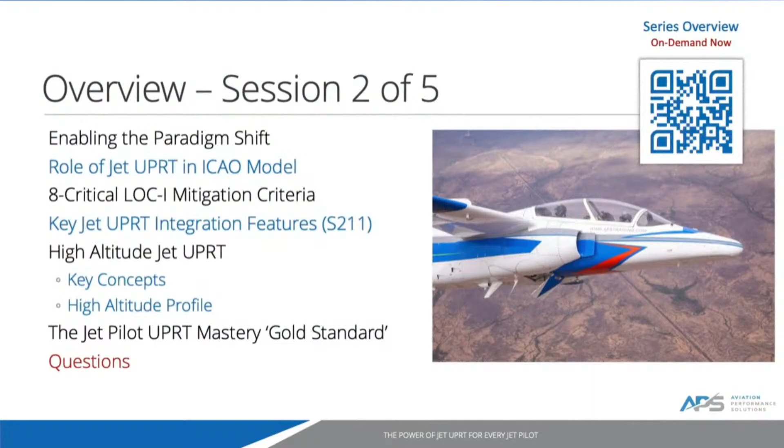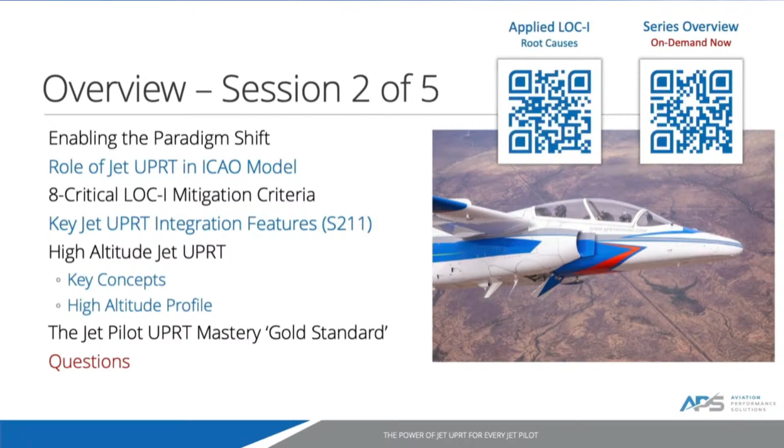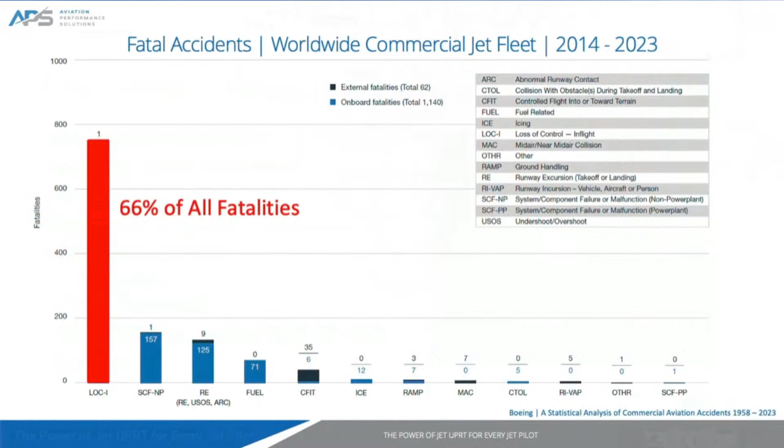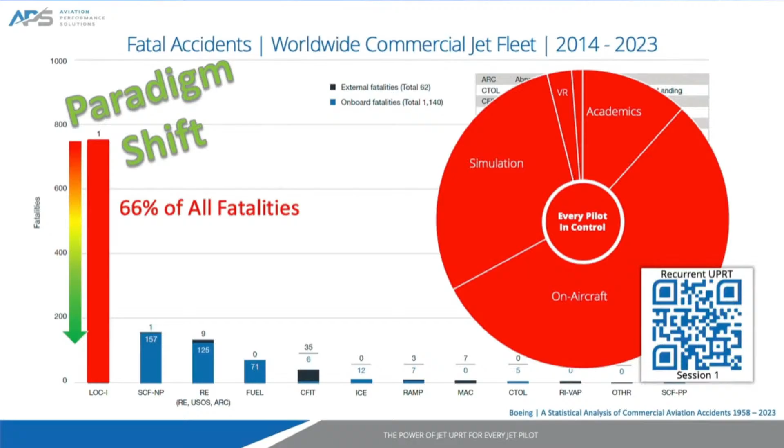All right, this quick review is just a reminder of how threatening the threat of loss of control in flight is and how we mitigate this risk. In our recent session, which I'll give you a QR code for in a second, we talked about the various platform contributions and how we mitigate this risk, which is really necessary to create the paradigm shift that we need to drive down that risk. A key part of that is not just on-aircraft training, but also jet upset training, which is really instrumental, especially for jet pilots. You can go ahead and do a deep dive on the application of the platforms, what proportion are used, and how much they contribute by simply going to that QR code in our last session, which was on recurrent UPRT.

And I hope you enjoy that. If you want to learn more about this particular diagram, you can go back and have a look at that session. Okay, so this is the opening slide.

And I think it's perspective building. If our jet UPRT is to give pilots a competency in this situation, it really requires a very intentional training process to accomplish that. But I want to remind everybody that the very first priority competency is that we don't want to be in that situation in the first place.

The second one, of course, is how to execute the recovery and to solve it. But really the most important value of recovery training is building the mental model to better understand the awareness, recognition, and prevention of the airplane upset in the first place.

So really the key priority, in addition to the ones we've talked about, is the been there, seen that value, or more specifically for on-aircraft training, the tremendous value it brings is on human factors, which we're going to be talking about in session 4.

So let's go ahead and jump in and talk about how we actually use different training platforms to make this situation something that pilots can understand, recognize, and prevent, or should they get there, be able to solve it.

All right, let's jump right in here now and talk about what ICAO did in 2014 after 5 years of work with 40 organizations and 80 experts around the world, which APS had the honor to be part of. They created some fantastic guidance and resources for the industry to follow.

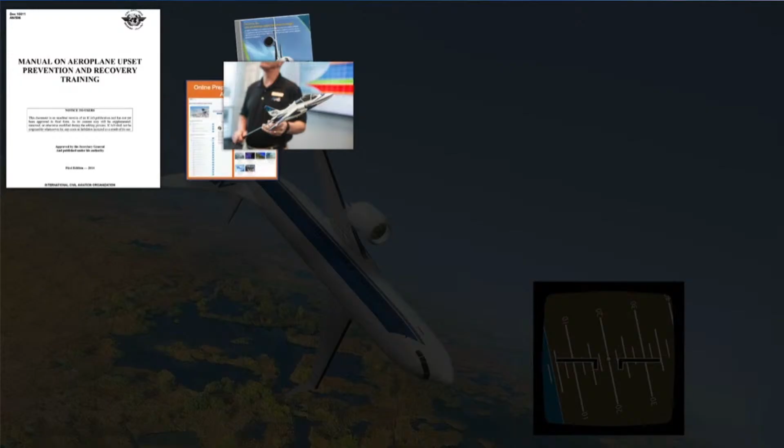As I mentioned earlier, it really talks about what to do. So with any critical training area, and especially important in upset prevention recovery training, we have to start with comprehensive academic training. That is the key, that is the foundation.

But unfortunately, academic training on its own is quite limited in its ability to mitigate the risk of loss of control in flight, for a number of reasons.

The skills are counterintuitive. Usually they require a sequence and movement of the controls that is different than what you would apply in your normal flight experience. And also what you end up finding is the human factors are very incapacitating in an airplane upset event if you haven't had proper training in how to perform in spite of them.

So let's move on to the next one now, which is on-aircraft upset prevention and recovery training. Most people see that, and also as ICAO envisioned, that would be accomplished in a piston aerobatic airplane. Now, ICAO doesn't require an aerobatic airplane.

They strongly recommend it, and so do we. In our judgment, you can't effectively deliver life-saving upset training unless you have an aerobatic-capable airplane and a highly competent instructor, which we'll get to in a few minutes.

Now, the third component that they have is advanced simulation. There's a couple of flavors of that. We have non-type specific and type specific simulation, and you can see there's a number of ways to approach that.

Now, it used to be just full motion simulators. Now fixed-based simulators add a lot, and now virtual reality as well. And APS uses all of these platforms in its program.

So this is what ICAO talked about, and its manual on UPRT is the combination of these three components, of which you can see simulation has two flavors, the non-type specific and type specific, to mitigate the risk of loss of control in flight, and that was in 2014.

Unfortunately, what we found delivering this, and we're the most active UPRT provider in the world with fully integrated upset prevention recovery training, there's a pretty massive gap between piston on-aircraft training and then the experience people have in the simulator. Now, they're very much indispensable. They can't be missed, and they have to be integrated.

What we really need to have is some way of mitigating and addressing this gap. Now, unfortunately, or fortunately, depending on how you look at it, a lot of people think, well, let's just go up in a business jet and address that gap.

Now, we're not opposed to doing some level of training in a business jet airplane, but it's very restricted in what it can do and what it can do safely, and very restricted in what it can contribute to the 8 critical mitigation criteria that we're going to talk about.

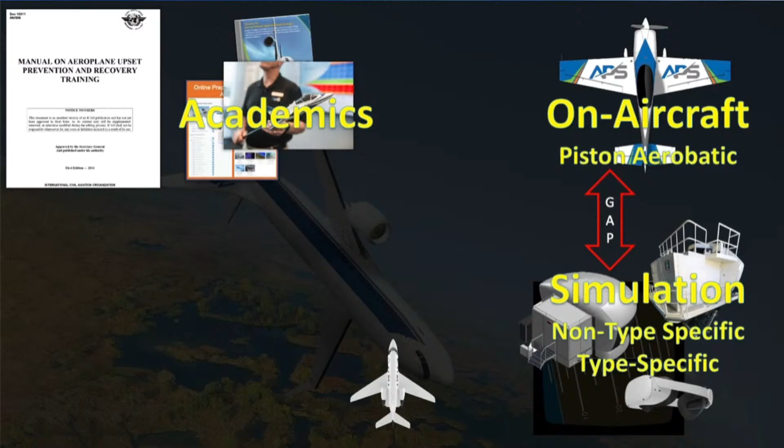So we consider the use of the business jet. While we don't oppose it, it's of questionable value and certainly is not the next step in our judgment after three decades and training thousands of pilots every single year.

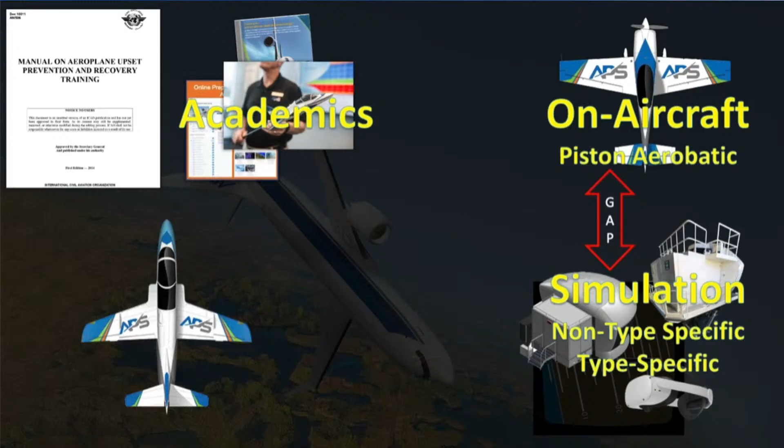So let's now jump into the S211. This is a swept wing, glass cockpit, high altitude, aerobatic, spinnable jet airplane. Now, even though we don't do spins in this airplane, it has the margin of safety that you have in any type of a stall or incipient spin maneuver. And so this is really a critical part that is missing that we found.

So in 2016, we invested in our first S211 jet to mitigate this gap. Because for us, it's all about saving lives. It's not meeting the letter of the law of the regulation, even though that has to be done. That is just pay to play. You have to address that as a bare minimum.

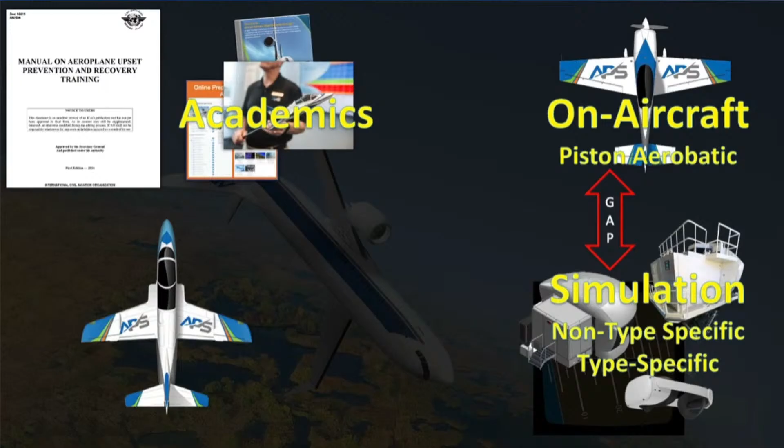And we go well beyond the bare minimum at APS, and we select platforms that provide the best training. If a business jet was the right platform, we would have one. We don't. We have a fleet of S211s, Extra 300s, advanced simulation, virtual reality, and very robust academic training. So the on-aircraft jet training — aerobatic capable, glass cockpit, swept wing — is really the key. That's the critical jet pilot transfer of skill tools we need to mitigate that gap. And every jet pilot ideally needs this training to be fully prepared for the environment that they operate in.

So this leads us later to a session on UPRT mastery, about how the mitigation of the risk of loss of control in flight — the design of that program has to be really designed around what, where, and how you operate it. If you're a jet pilot, you really need to have real-world on-aircraft complex jet airplane training at medium, low, and high altitude, to be truly prepared.

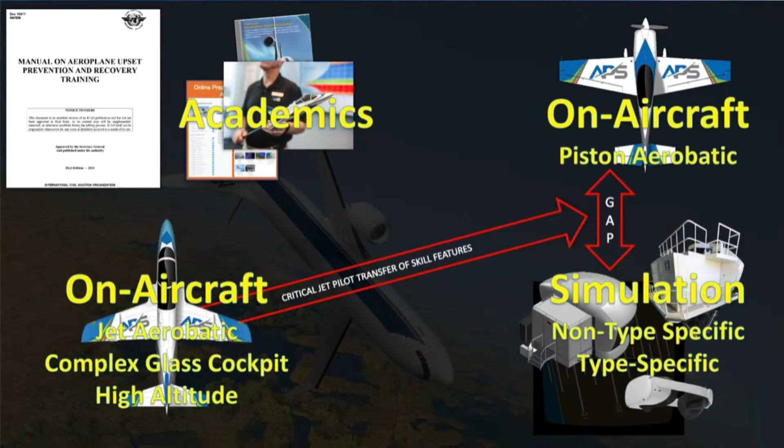Now, it doesn't contradict, it complements the existing training, because you may get your type rating training and your recurrent training and address UPRT in the simulator. The training you receive at a UPRT provider should be directly in alignment with industry best practices, to be sure what you are teaching or receiving in that training is a direct complement to what you're trying to accomplish in mitigating the risk of loss of control in flight.

Now, one thing I will say is the very best training platform in the world for mitigating the risk of loss of control in flight is not the platform itself. It's the instructor that facilitates that training process, that brings their expertise to bear on you and your personality and your style and the platform being used, to identify the transferable valuable areas and minimize the negative transfer items, because every platform has items that don't transfer well.

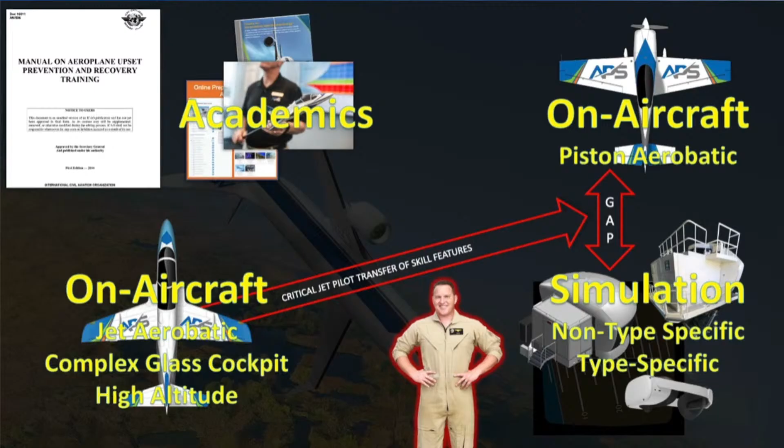For example, an aerobatic airplane — you can have control inputs in that airplane that work well in it, but don't transfer to a commercial airplane. Just like in the simulator, even though it's representative of how the real airplane works, its motion cueing is almost always wrong except for the initial onset of motion. So every training platform has great potential, but also great limitations. So the only way to truly mitigate this risk is a combination of platforms.

Now, let's return to that circle that we saw earlier in the statistics. So we need to now take these platforms that are currently all red, because loss of control in flight is the number one risk to air safety, and now drive down that risk by filling in the pie with the appropriate use of these training platforms. You can see the relative contributions as shown here, done by a provider that's following the Every Pilot in Control solution standard.

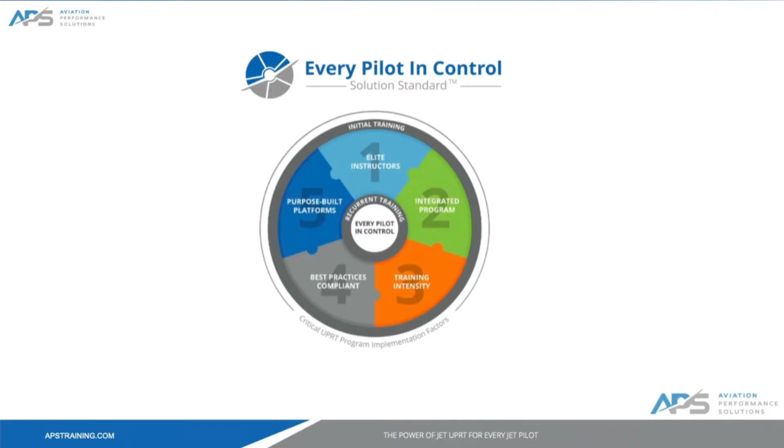In fact, we're talking specifically about how the JET all-attitude platform now complements and reinforces an identified gap in the ICAO model that they issued. And then, of course, initial training has to be intense, and recurrent training, if done effectively, complements that initial training.

So initial training is typically about 3 days. Recurrent training done well is about a day. Now, what we want to talk about next is these 8 critical criteria.

We're not going to dive into these today, but at APS we've learned over 3 decades that these 8 critical criteria—they're not the only ones, but they're listed in order here—are what a training platform needs to accomplish, and what the instructor needs to leverage out of that platform to create the competencies for the pilot to be ready for, aware of, recognize, and prevent an airplane upset or recover from it. If a platform doesn't inform or nail any of these areas, it's likely not an effective platform for mitigating the risk of loss of control in flight, in our judgment.

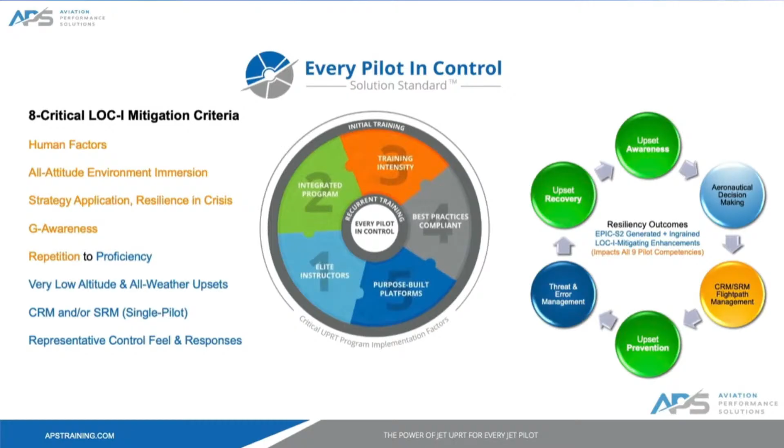So by having an effective program that is grinding on these 8 critical criteria, what we see is it generates these green circles of competencies inserted into the typical ones we hear about all the time: aeronautical decision-making, CRM, threat and error management. You can now see 3 green circles of upset prevention—upset awareness on top, and upset recovery at the bottom. That is the goal of an effective upset prevention and recovery training program.

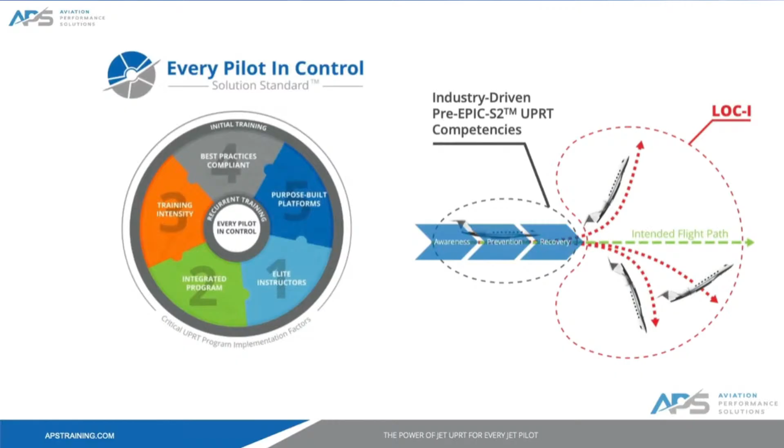The idea is to take this bubble of competency that everybody carries around right now with standard training received at initial and recurrent—given that loss of control in flight is the number 1 threat to air safety—and now evolve it using the Every Pilot in Control Solution Standard, with competent instructors and all the requirements of the standard, to expand that envelope, not just into the recovery region, but look how it expands into the awareness and prevention region as well.

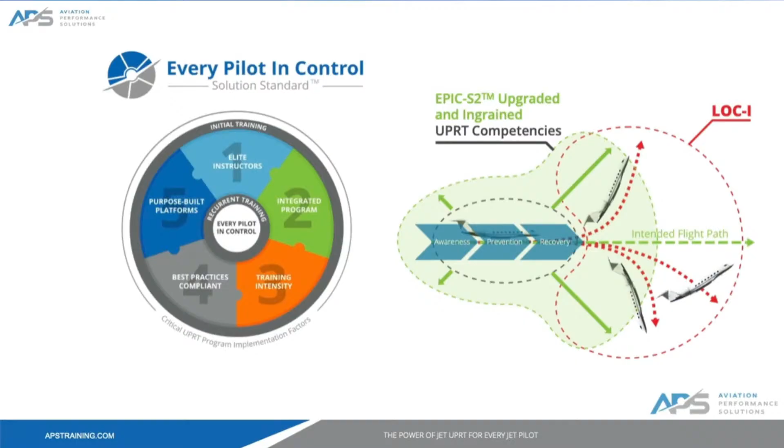So it's really exciting to see this evolution coming across the industry, and what we're seeing for the outcomes of what an effective program can do.

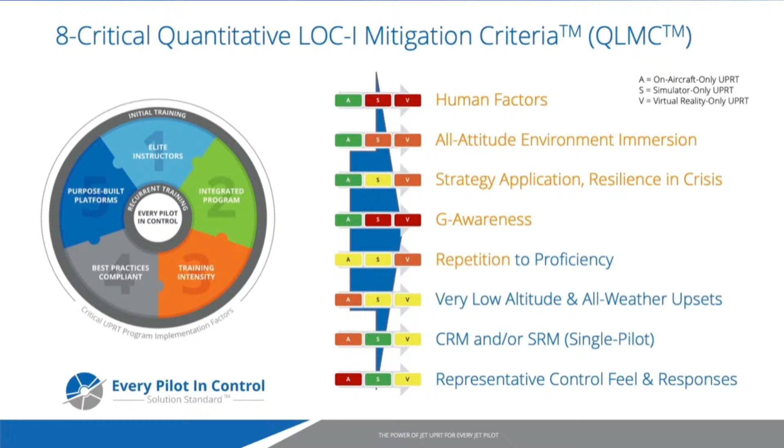It needs to be an integrated combination, for example, of repetition to proficiency or very low altitude all-weather upset. So that's the idea behind the Every Pilot in Control Solution Standard, and this is where the role of the JET comes into play. So let's now dive in.

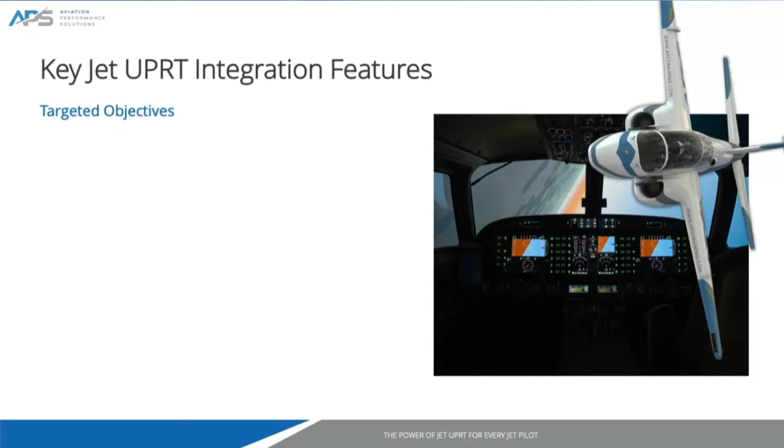First off, understanding that when we're talking about these areas, we're now talking about the integrated combination of the on-aircraft platform with simulation. On the right, we see the JET, the S211 JET. In the background, we see the paired integrated simulation program that should be occurring in close proximity, within a day at most, to complement the on-aircraft jet upset training.

So what are the targeted objectives? Well, first and foremost, the most important value of any on-aircraft training, and especially jet on-aircraft training, are the associated human factors. That is simply something you don't get in piston all-attitude training, and certainly something you don't get at all in advanced simulator training. You need to experience what these airplane upset events look like, both in prevention, awareness, and recovery, in the real airplane, to have the fidelity of human factors so that you can truly say, been there, seen that.

So should you face that in a complex jet airplane at high altitude, for example, you've been there. You know how to perform in spite of the incapacitating human factors that you'll surely be facing. The jet airplane, the jet platform, especially the all-attitude platform, is really key at being able to accomplish that.

Now, you will see that in the simulation, but that combination of fidelity of being in the real airplane, in a real jet, and seeing those turn rates and radiuses and inertial impacts is very compelling and very powerful.

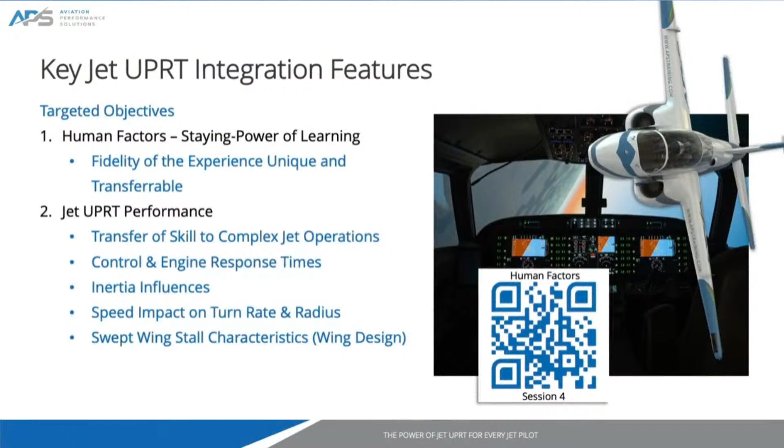So the nice thing about the S211, it's a swept wing airplane, and its wing design presents swept wing stall characteristics. Also, the glass cockpit is tremendously valuable. Some aerobatic piston airplanes will have that, but the combination of that jet performance and the glass cockpit environment is immensely valuable.

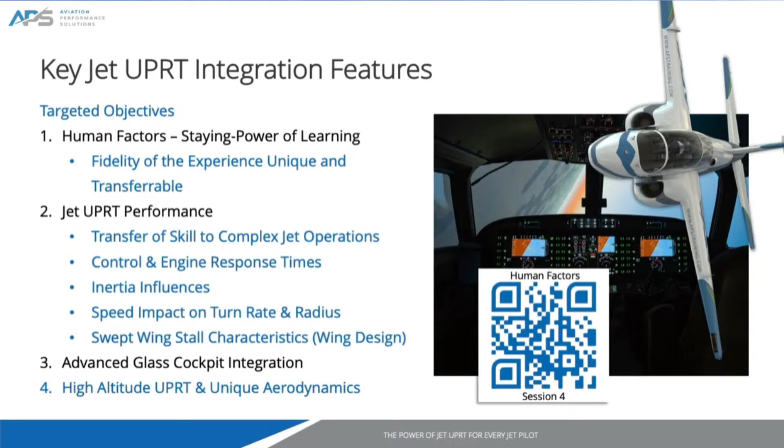Then the last point here today is the high altitude UPRT and the unique aerodynamics that you face in the real world. Even seeing that in simulation, it's just a completely different level of experience when you see that in the jet airplane. In the real world, it just makes a tremendous amount of sense when you do it that way. In fact, when we get to the questions, we have a number of videos here that we can play if we have a break in the questions, and I'll show you some of those examples.

All right, let's move on now to the high altitude critical concepts before we move on. There's a few areas in here. You can see this very wonderful diagram where we can actually see the maneuvering margins and how they get reduced as you start going up in altitude.

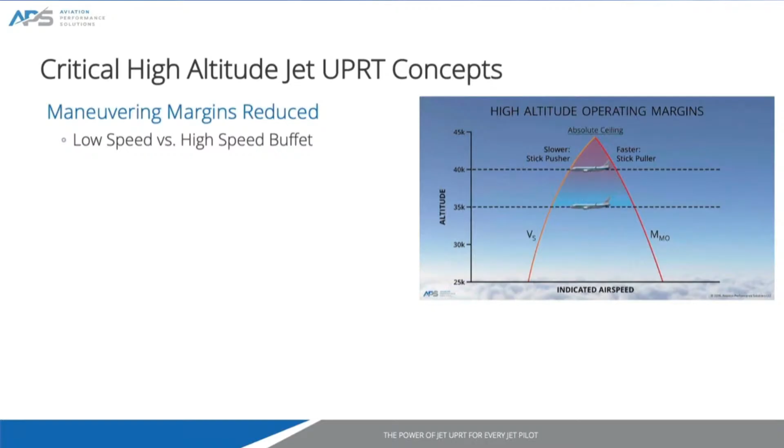So the low speed versus high speed buffet, as you can see in the diagram, is really, really critical for pilots to understand: those maneuvering margins reduce as you go up in altitude. So not only are we seeing here with the indicated airspeed of the stall increasing towards MMO in this case, but also as the Mach number increases, the stall angle of attack decreases. So there's added complexity in high altitude jet operations.

As part of that training, we also need to understand how we avoid the inadvertent slowdown into slow flight.

That thrust limited condition is something you need to see in the real aircraft, and also that it requires more altitude loss to recover. We have a great video that maybe I can play, and we get into the questions where you can see that it just takes a very long time to recover from a stall, for example, at high altitude.

There's a strong tendency in the real world, where human factors are spiked, for pilots to want to recover early like they would at medium and low altitude, and just perpetuate that stall for many minutes, far longer than they need to. They need to have patience to accelerate to their cruise climb Mach before they try to level off, ideally at a level below where the stall occurred.

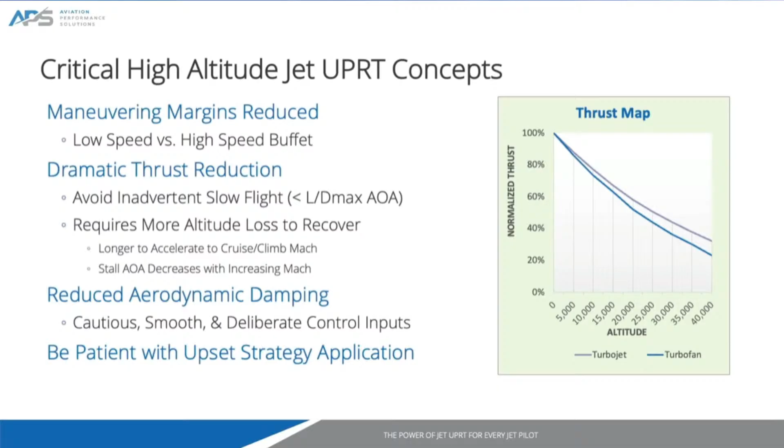The other part that people have a hard time with, and I want to repeat, is simply being patient. We always talk about how, as we go above flight level 250, while the human factors want you to accelerate and speed up, the aerodynamics really force you to slow down and be very intentional about how you handle the airplane.

So the S211 is really a powerhouse when it comes to high altitude training and even low altitude training. We see it being very capable and very representative of business jet and airline performance, and it's very transferable. But remember, the jet upset training platform like the S211 should be, and has to be, paired with the associated simulator training.

Going into the simulator is the absolute best way to get representative control, response, and feel, working in your environment, seeing your instrumentation doing what it needs to do. So the type-specific and non-type-specific simulator training, as part of the ICAO model, are critical.

But we have found the real-world, on-aircraft jet training is a massive gap in the ICAO model, which, as I said before, they did not intend to have. It just didn't seem realistic at the time that this was going to happen, or maybe they weren't aware of how big the gap was going to be. With the amount of training we do at APS, we see it all the time.

All right, let's go ahead and jump into the high altitude profile, how we accomplish that in the S211. Remember, it's complementing simulator training, so this is not a standalone. The training starts in the on-aircraft; we start at low altitude in the S211, then we go to high altitude, and here's the typical profile.

We take off and go to medium altitude, phase 1, and do calibration exercises. From there, we climb up into high altitude and repeat those calibration exercises, including the thrust limited slowdown condition, to see the massive contrast in performance.

Then we take a look at the right thing to do, and sometimes the wrong thing to do—for example, when you get overbanked and attempt to do a split-S type maneuver. Finish off the profile as we take a very significant change in performance from high altitude, at or near the maximum altitude of the airplane, all the way down to the lower altitude, usually between about 10 to 15,000 feet, where we can see a massive change in the performance of the airplane, further highlighting the transferable value of high altitude training.

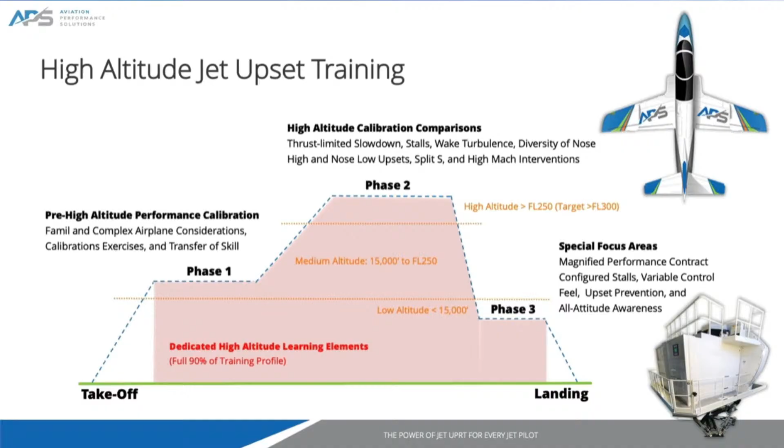Then we continue with complex upsets, variable control feel upsets to continue the training. As you can see here, a full 90% of the high altitude profile contrasts performance between medium altitude, high altitude, and lower altitudes all the time, reinforcing the original learning we experienced in the jet airplane.

So if you go back to the recurrent program, we talked a little bit about this. This is the UPRT Mastery Program. We're going to see way more of this in session 5, where we have a dedicated session on UPRT Mastery. But for jet pilots out there looking for the gold standard in upset prevention and recovery training, it lives here. It's comprehensive academic training, on-aircraft piston training combined with jet training, low and high altitude, with non-type specific and type specific simulator training for you when it comes to APS.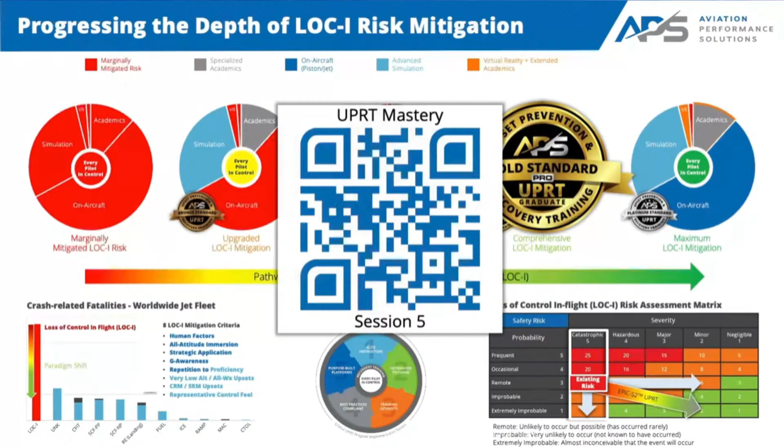All right, folks, let's wrap this up so we can go to questions. So I just want you to remember that jet pilots need upset prevention and recovery training, but it has to be part of an integrated program. And in our judgment, to truly mitigate your risk or design your UPRT program around what, where, and how you operate, it necessarily requires jet upset training to complement academic training.

Specialized academic training as well, high performance academic training is required, combined with piston, simulation, and also the program needs to be delivered in accordance with the international standard, the Every Pilot in Control Solution Standard, pioneered by APS and freely released to the industry in 2019.